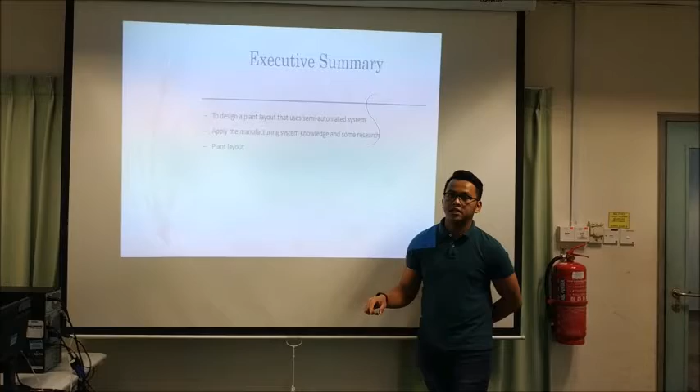Next, about the summary for the whole presentation. Our objective is to talk about our design for our plant layout. Basically, our plant layout is made of a semi-automated system which consists of human workers and machines. Then we're also going to apply the manufacturing system knowledge that we have learned.

Now we're going to talk about the background of gasing. Gasing, the name came from two Malay words, gah and pusing, which combined becomes gasing. It is the oldest toy that has been played by people for over 6,000 years. It originated from the east coast of Malaysia, including Terengganu, Kelantan, and Pahang. According to players from Sungai Pahang, gasing is a flat and round object that has been used for hunting back in the olden days.

It is also known to have originated from the mangrove apple spinning game, because the shape of the mangrove apple is the same as the shape of the gasing. However, according to Berita Harian, nowadays the gasing game has become less popular because of online games and technologies used nowadays. So there's an organization trying to make the gasing game popular again, which is why we're planning how to manufacture the gasing more accurately according to the technologies nowadays.

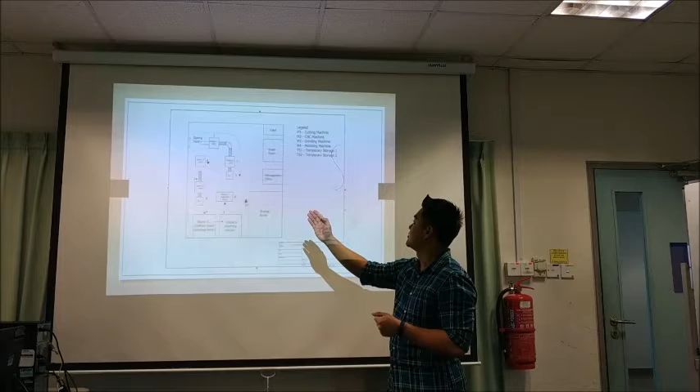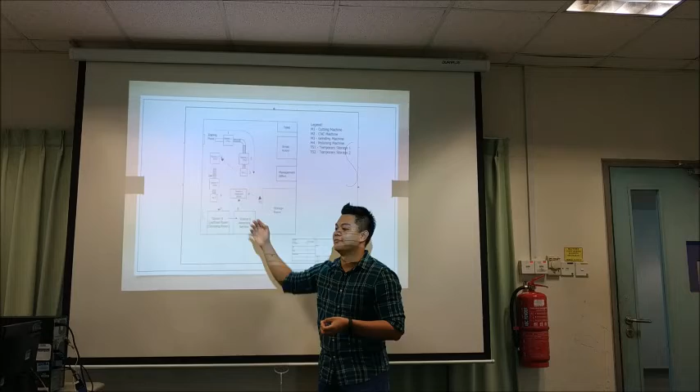Station 3 is the grinding machine, then we move to station 4, the polishing machine, and there's another temporary storage. This temporary storage will transfer it to station 5, the confined room, which is also the spraying room. After that we move to the assembly section, where we assemble all the items before moving to the inspection room. After inspection is done and QC is passed, we store it in the storage room.

As we can see, the progress of each station: station 1 is cutting, station 2 is the CNC machine, station 3 is the grinding machine, station 4 is polishing, station 5 is spraying, and station 6 is the assembly side.

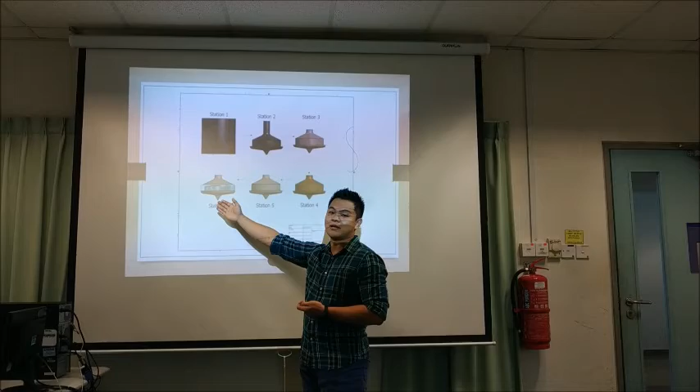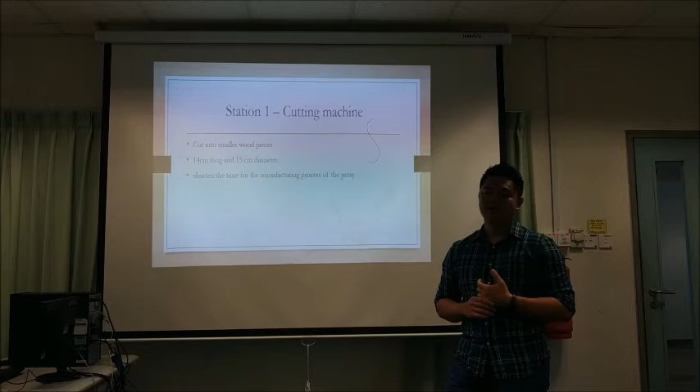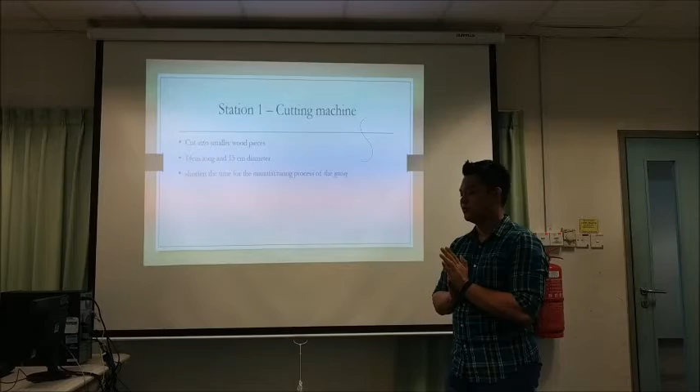For the first part, the starting point, there will be a wood which is 5 meters long and 15 cm in diameter placed at the starting point. At station 1, the cutting machine, the piece will be cut into smaller wood pieces, from 5 meters long into individual 14 centimeter pieces, with the 15 cm diameter maintained. This is to shorten the time for the next process, the CNC, which has a limitation in length.

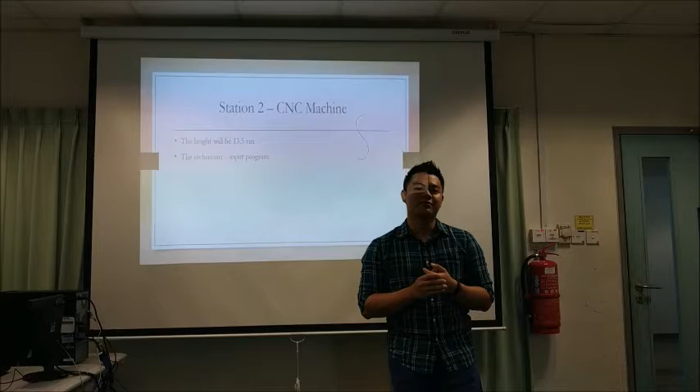Before we reach station 2, we convey the wood piece to station 2, where the worker will insert it into the CNC machine chuck. The program, which is input by the technician beforehand, will run and the coding will run accordingly.

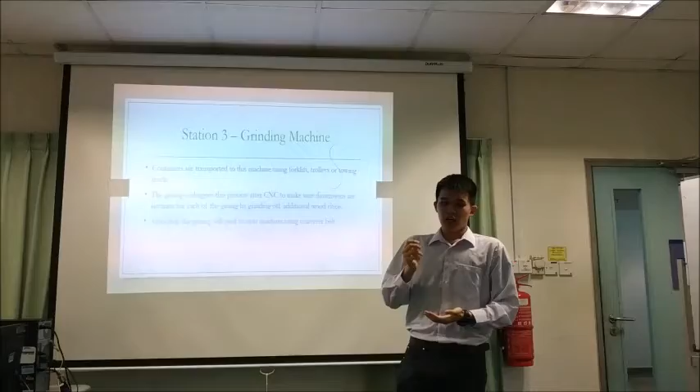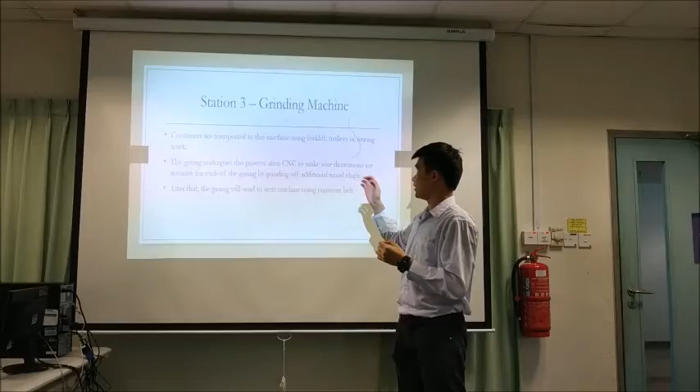After the CNC machine, station 2, we have temporary storage one, where we store the finished product in a container to be moved to station 3, the grinding machine. These containers are transported using material handling systems such as forklifts, trolleys, or towing trucks.

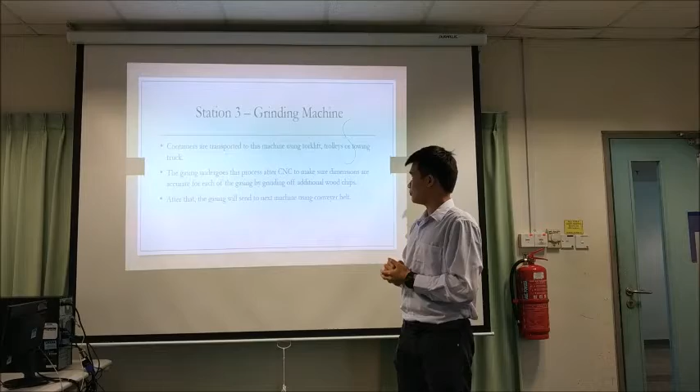Then the gasing undergoes the grinding machine process, to make sure the dimension of the gasing is accurate for every product, by grinding off additional wood chips still stuck on the product.

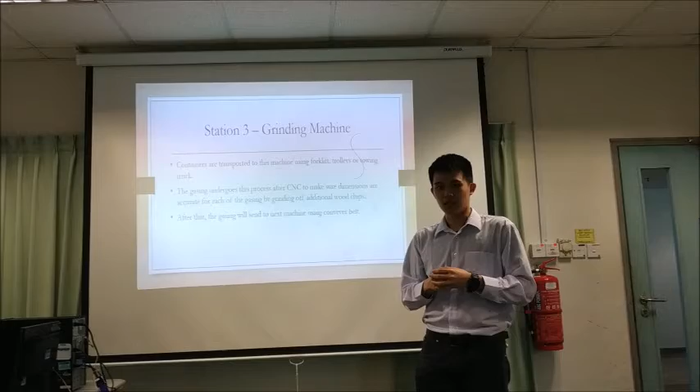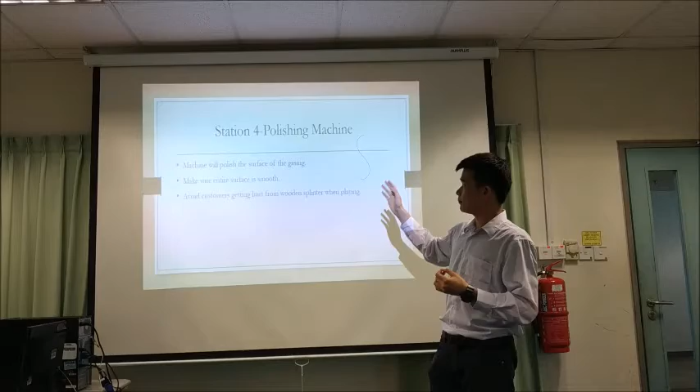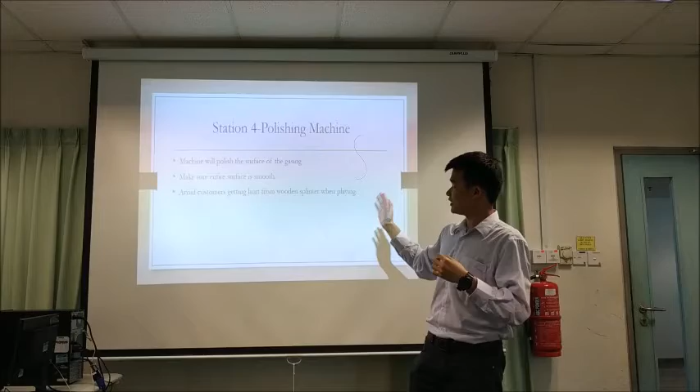After station 3, the gasing is sent to station 4, the polishing machine. In this process, the machine polishes the surface of the gasing to make sure the entire surface is smooth, in order to avoid customers getting hurt when playing, since a rough surface may cause wooden splinters to hurt the customers.

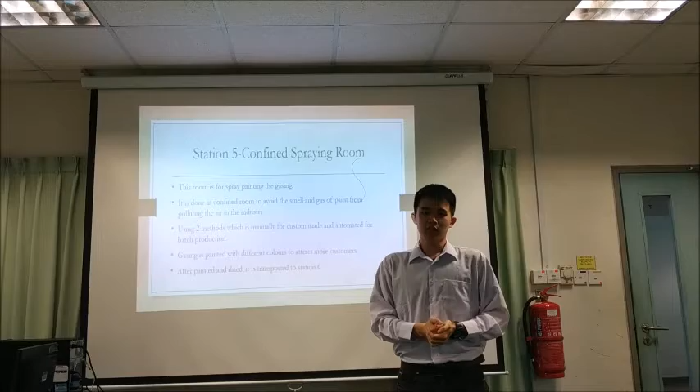After the polishing machine, the gasing is put again into temporary storage 2, which is also a container. This container will be transported to station 5 using the material handling system such as forklift, trolleys or towing truck. Now at station 5, which is the confined spraying room.

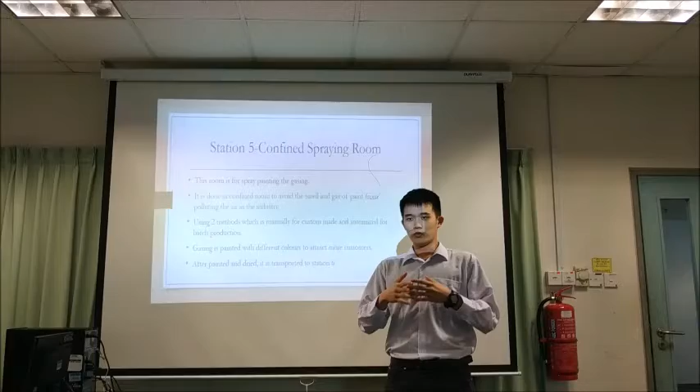This room is used for spray painting the gasing. It is done in a confined room rather than outside in the factory surrounding, in order to avoid the smell and gas of the paint from polluting the entire air of the industry.

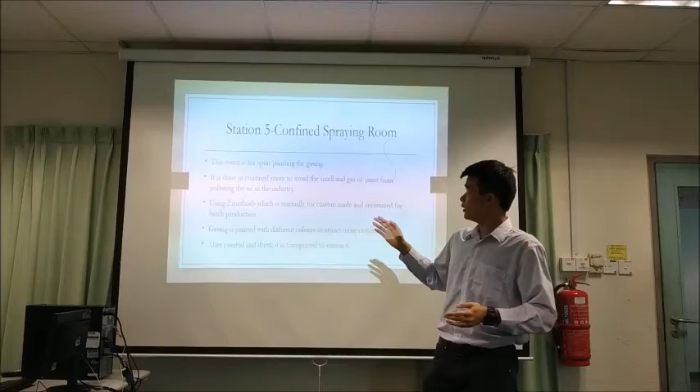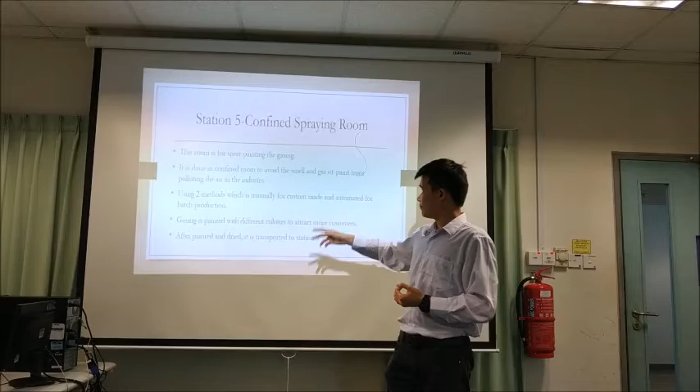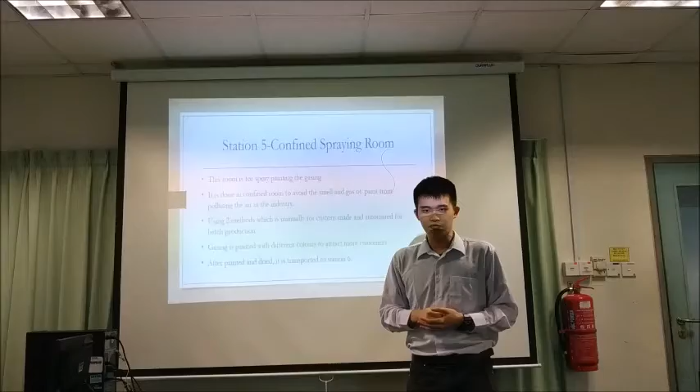In this confined spraying room, the workers in the industry use two methods of painting the gasing: manually and automated. Manual painting is used normally for gasing which is custom made or when customers want to order specific gasing. Automated painting, using machines to paint the gasing, is for batch production, for large quantities of gasing to be produced.

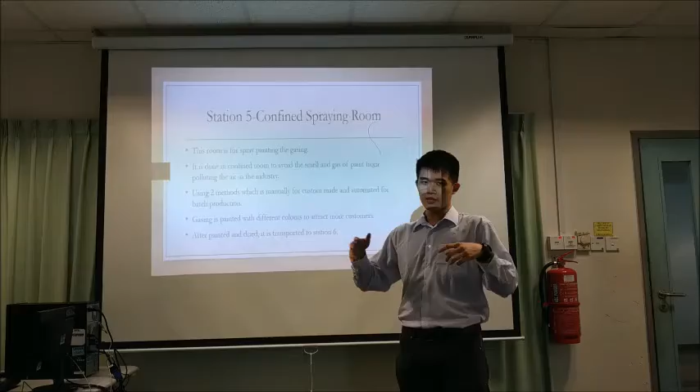Then the gasing will be painted with different colors, which will make it brighter to attract more customers to buy the gasing. After the gasing is painted and dry, it is transported to station 6 using the same material handling system.

Then at station 6, which is the assembly section, our product gasing will be installed with additional metal weights and tips. By installing this additional metal weight and tips, it will make the gasing able to spin longer.

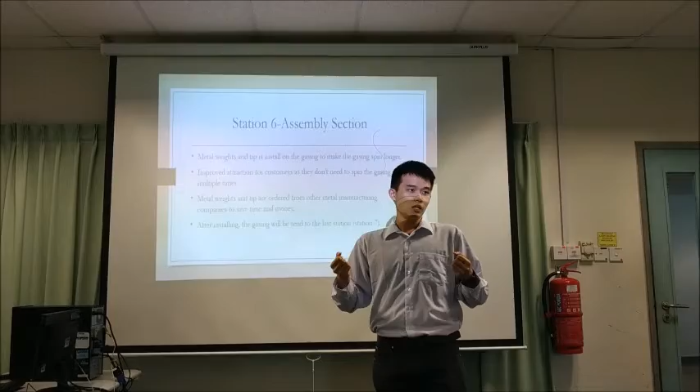By installing these additional things, it will make the gasing spin longer to improve the attraction of the gasing to the customers, because customers will not want to spin the gasing for only a short time, like 1 or 2 minutes. By installing this, the gasing may spin for 5 minutes, so customers don't need to spin the gasing multiple times.

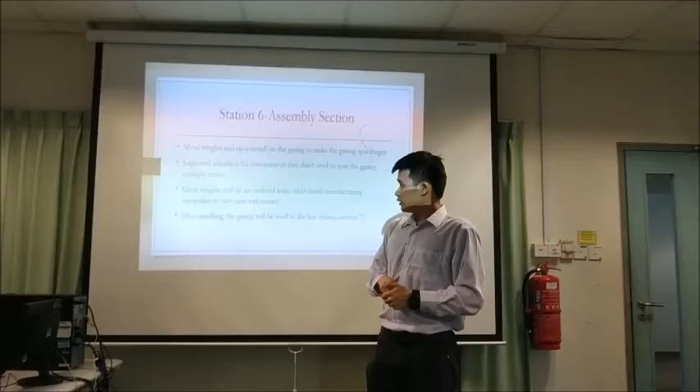So the metal weights and tips are ordered from other metal manufacturing companies, because our company focuses on producing the gasing. By ordering the metal weights and tips from other metal manufacturing companies, this will help save time for our company and also save money, because our company does not need to buy extra machines or spend extra time to manufacture these metal weights and tips.

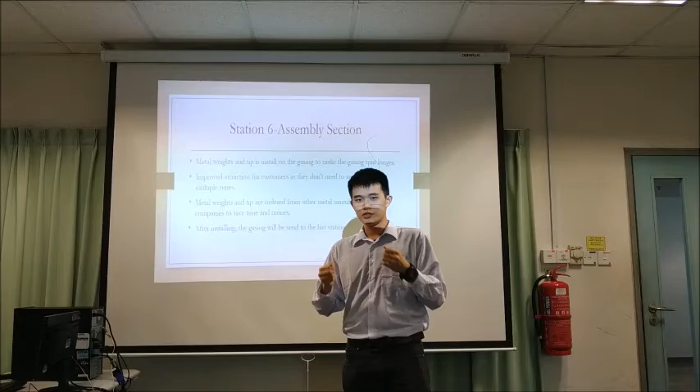After installing the weights and tips, the gasing will be sent to the last station, which is station 7. At station 7, which is counted as the most important section, is the inspection room.

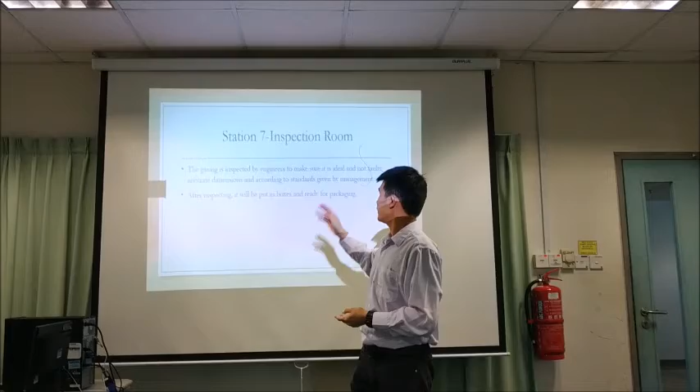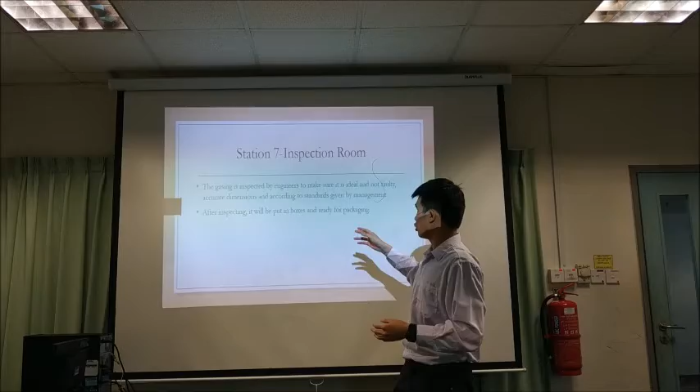In this room, the gasing will be inspected by professional engineers or technicians to make sure that each gasing is ideal, not faulty, accurate in dimension, and the dimension is following the standards given by the management.

After inspecting, it will be put in boxes, ready for packaging, and sealed up ready for packaging. This storage room is used after the packaging of the gasing.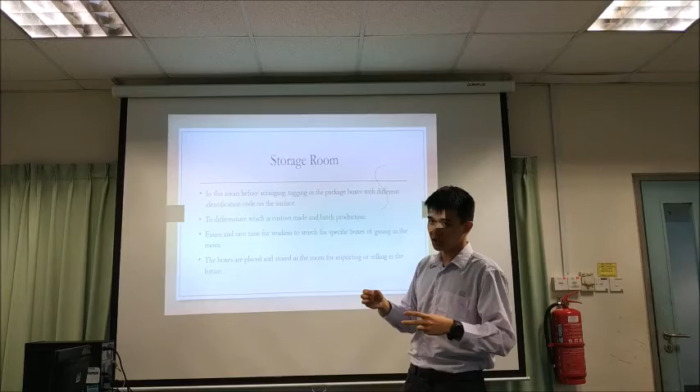In this room, before arranging the boxes in the storage room, tagging in is also an important process for the packaged boxes, because tagging in is like putting an identification code on the surface of the box.

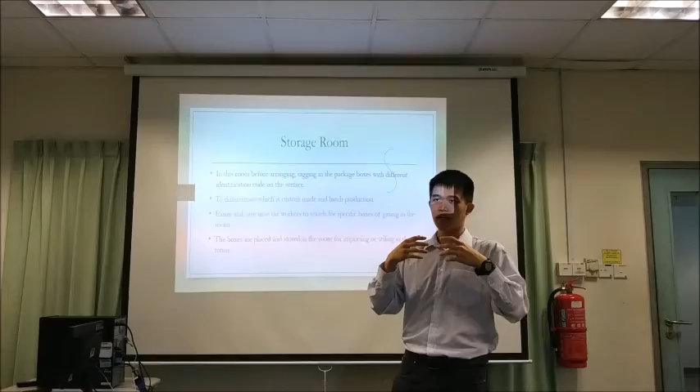This will help the technician, workers, or engineers differentiate which packed boxes contain custom-made gasing or batch production gasing. This will make the workers in the industry or company's lives easier, and save time for them when they are required to search for specific boxes of gasing in the storage room.

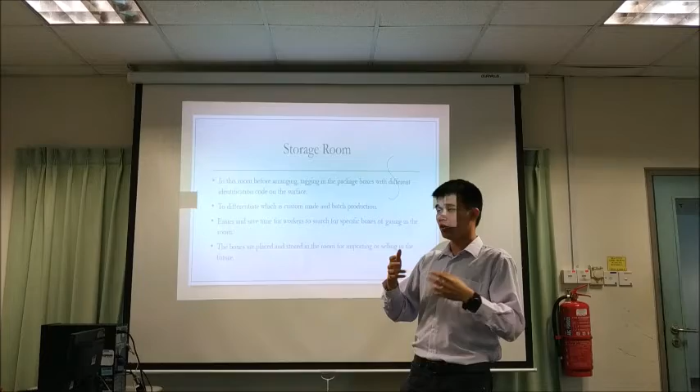Then after tagging in, after putting the identification code on different packed boxes, the boxes are placed and stored in the room for importing or selling to the customers in the future.

I am going to explain the discussion of our project proposal, which is the system used in our product manufacturing, the machine used, the transport system used, and the storage system used.

For the system used, we are using a semi-automated system whereby both human workers and machines are required. The presence of human workers here is to ensure that the progress of our manufacturing process is smooth, and the human workers organize and supervise the machines so that no flaws occur.

Next is the machine use. There are 5 machines that we are using in our production: the cutting machine, CNC machine, grinding machine, polishing machine, and the spray paint machine.

These machines are first operated by human workers, where they input the values in order to set the size and dimension for our product. This is to ensure that the requirement for our product specification will be met.